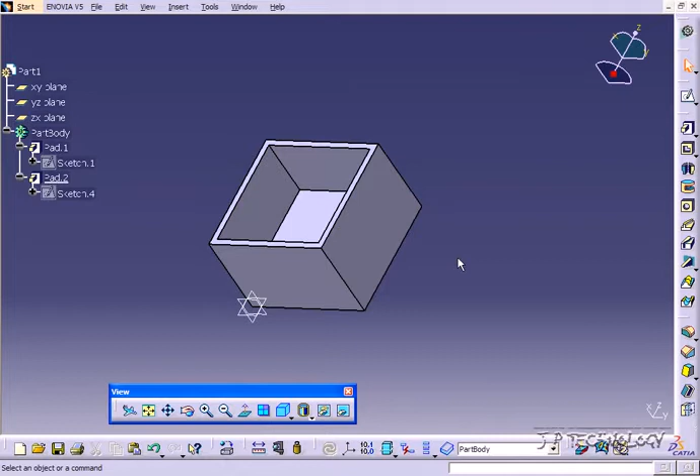Now, to use the Stiffener, all you need is one profile, or one line that's opened, and from that you're able to make a stiffener. So what we're going to be doing is creating a line along here and extruding it across. So to start off, let's click this face here and we'll click Sketch.

Now when you're drawing these lines in here, there's two different ways to do it. You can go from line to line, touching the points there, or you can do it inside the box without touching any of the lines. So this is two different ways of making a stiffener. The first one we're going to make is just draw lines that are inside this box, not touching the edges.

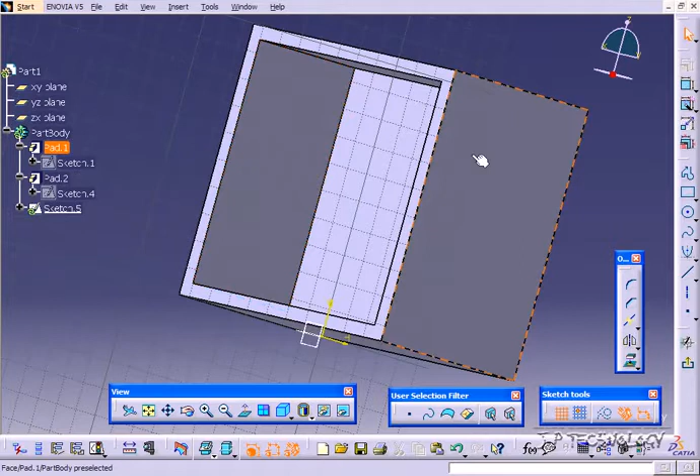So let's just rotate it around a bit and just draw a little line just like that in there. And if you look on the side, you can see that it's inside the box. Now go back up, click Stiffener, and we're going to be using the from side mode. You're going to be able to use the from top mode when you click on the points to points.

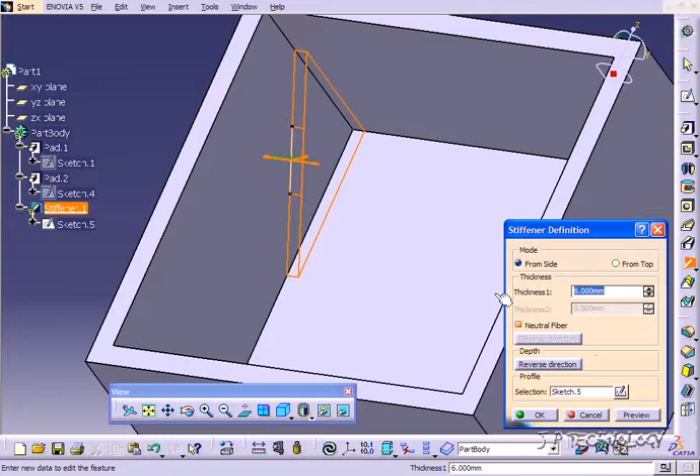So if we zoom in, what this is going to let us do is we're able to, with a thickness, slowly bring that sketch out. Now you'll notice that our sketch is only in here, but what this is going to do with the stiffener is it automatically extends it out to the edges and kind of cleans everything up for you. So let's bring this out 20, and we'll click OK. And the stiffener's come out 20 millimeters.

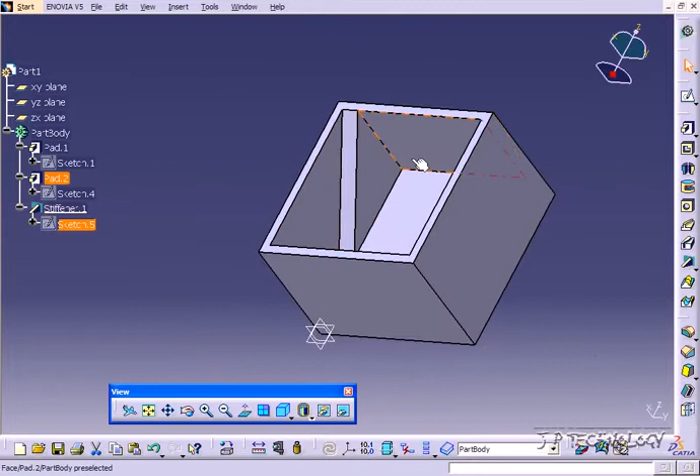Now let's double click on this sketch, and let's just move this around. So let's drag this guy more over to here, and let's see what our result is. And you can see that now our stiffener has moved over also. Now let's delete this stiffener, and we're going to do it the other way that I was talking about.

So let's click this face, click Sketch. Now click this face, and we'll project the edges, turn them into construction lines, and now we'll sketch from point to point. So we'll do one from this point along here to a point along there. Now let's put a little angle in there so we can play with it after. So we have an angle about 30 degrees.

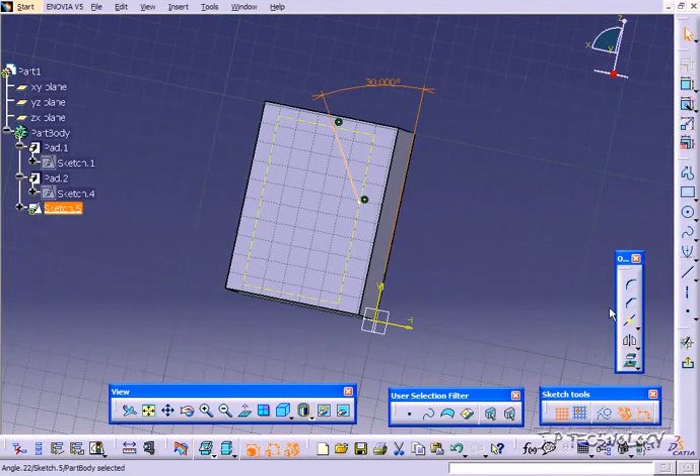So let's put in 30, and let's go back up, and let's click the stiffener. And from this one, you can use the from side or you can use from top. So right now on the from side, we're making exactly the same one that we had before. From top, we're going to make one that's going to have a hollow opening in it. So let's click OK.

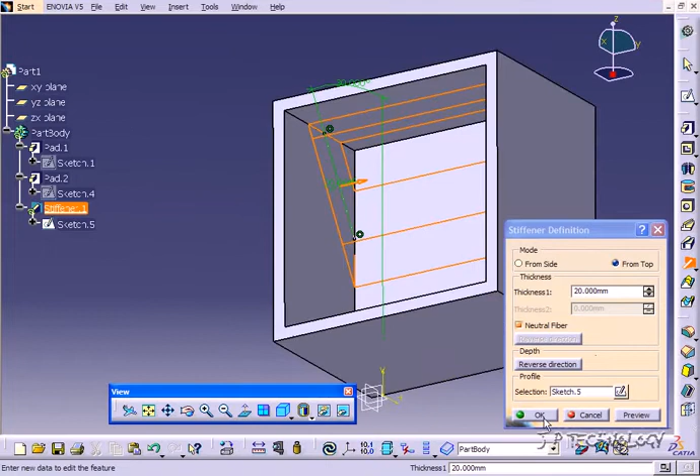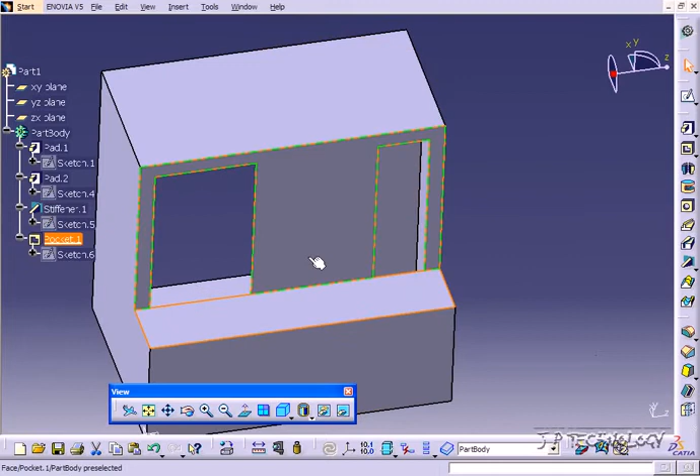And let's click on this surface here, and we'll sketch out quickly a rectangle and just cut this little bit out just so you can see the gap in there. So if you can see in the back there, you have a gap, and that's what using the from top compared to the side is there. And let's go back.

Now let's make the stiffener again using this point to point, and we're going to use the from side. So this is just like the other one. We're just going to extend it out 25, click OK, and we'll edit this sketch, change the angle to about 60.

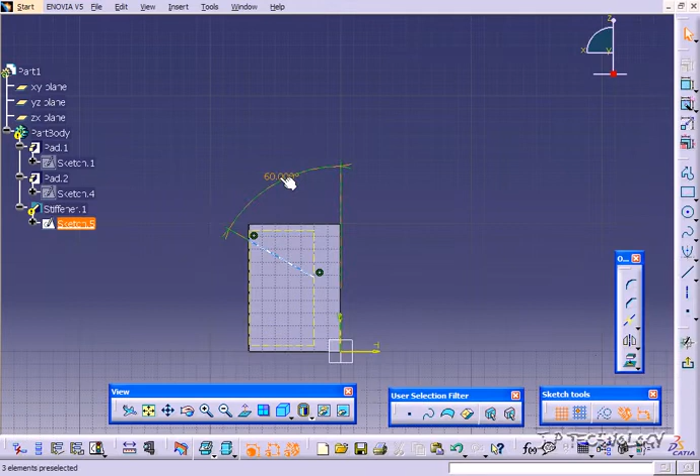And because it was outside, it's not going to work, so let's go back into it, put it to 45, and just bring it in. And it should work this time. And it does. So you're able to play around with the stiffener like that. Now let's do one that's on the top.

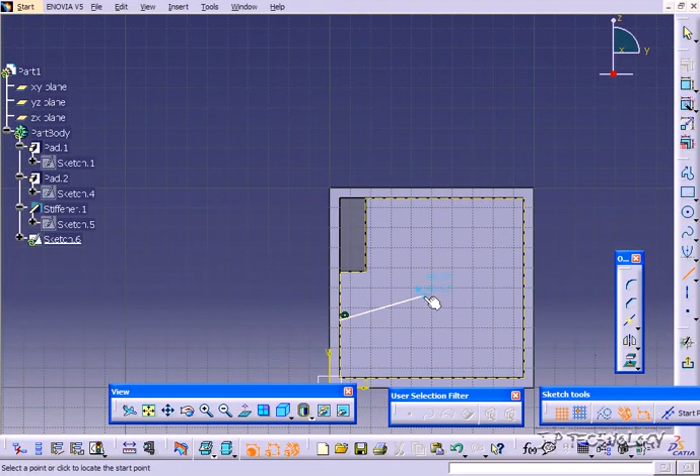So let's click this top surface here, click Sketch. Now we'll click this face here, project it out, and turn it into construction lines, and let's just draw a little jagged line across. And we'll go back up, and we're going to create a stiffener from here. Now click OK and click from top.

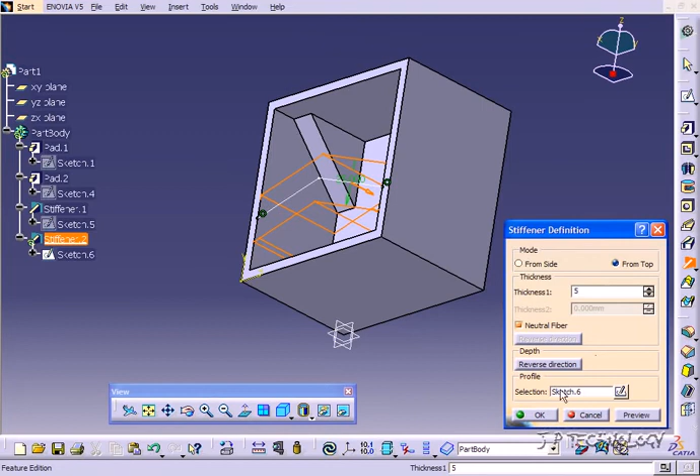So now we're able to create the stiffener from the top in this mode. So let's bring this down to about 5 millimeters for the thickness. Click OK. And now we've made a stiffener in here for about 5 mils. So what the stiffener does is we're allowed to just use one sketch line, and you're able to create kind of like a stiffener inside the part that adds like ribs and whatnot. Now we're going to make one more from here.

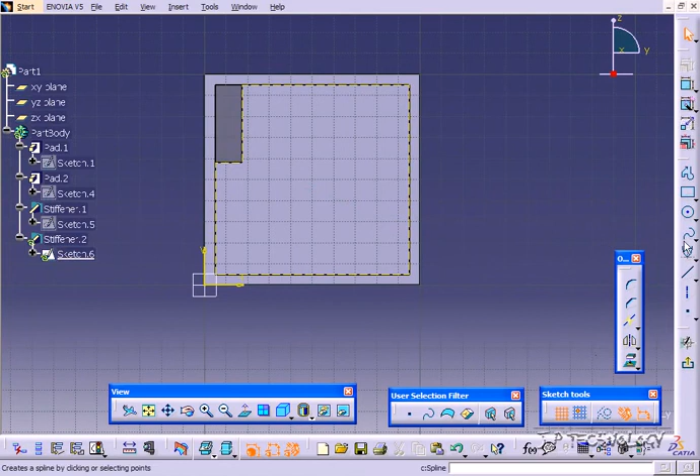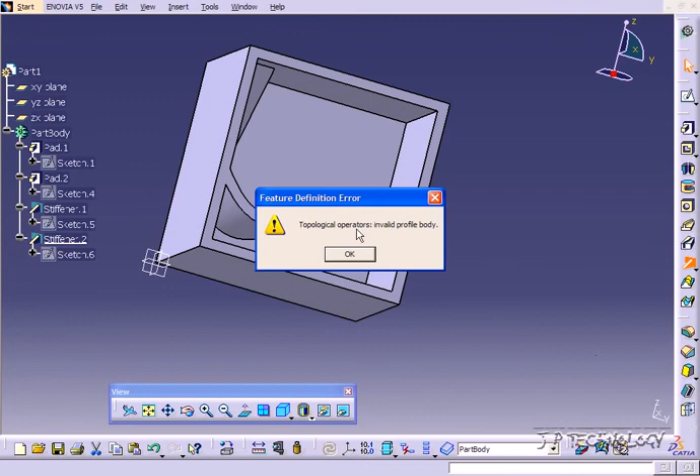So like I was saying, with those lines, all you need is one line that's open, not a closed profile, and then you have to toggle between the from side and from top to get the results that you want. So by doing this, you're able to create stiffeners inside parts quickly and easily just from a single line. And that concludes our tutorial on how to use the stiffener feature within Catia v5.